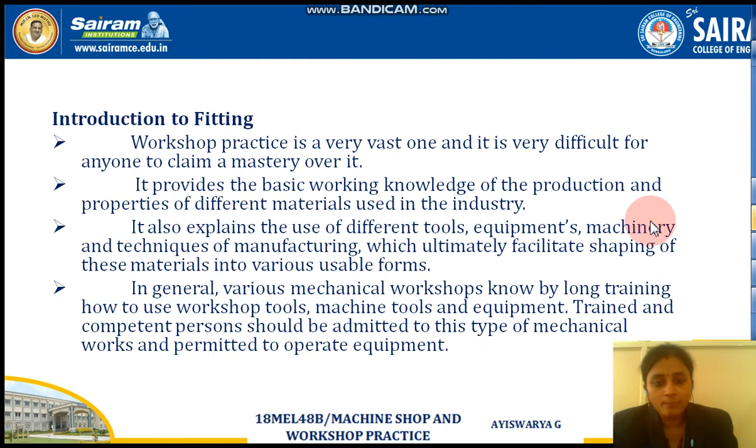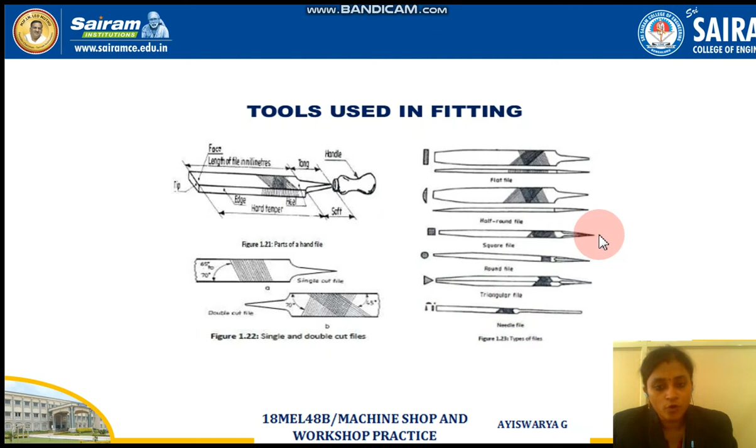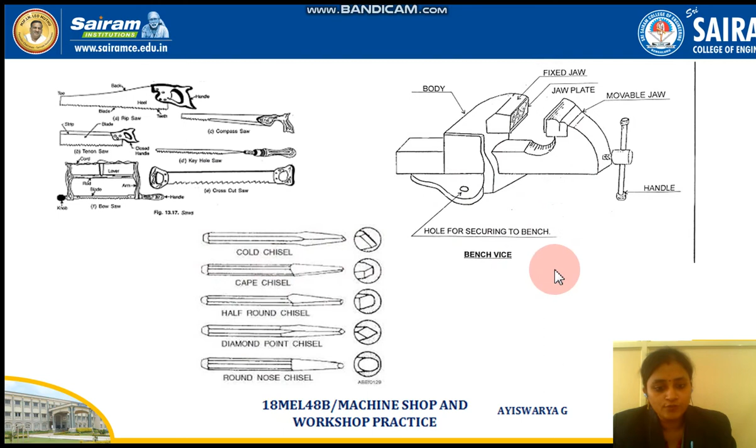Next one is different types of chisel. These are also classified with respect to the tip shape: round nose chisel, diamond point chisel, half round chisel, cape chisel, cold chisel. These are the different types of chisels. So we shall see it further.

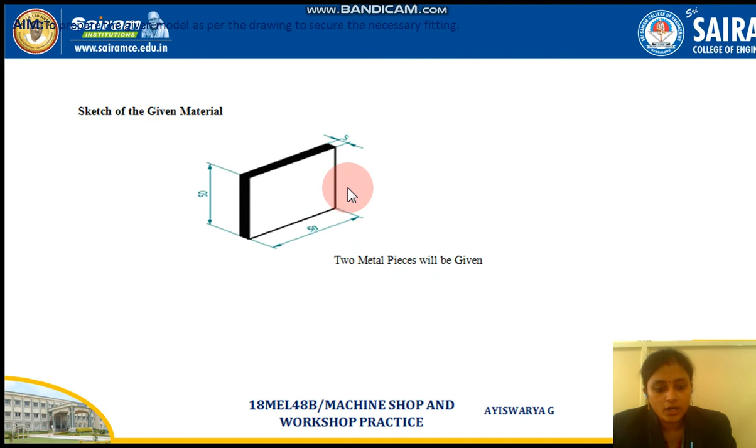So the adjacent sides of the workpiece should be filed using a flat file. First, what you have to do is mark the portion which you want to cut, or the unwanted portions, and then using a punch and a hammer, just punch the portion which is to be cut.

Next, you have to fix the pieces in the bench vise, and using the hacksaw we need to cut the marked portion. Where we cannot remove it using the hacksaw, you can remove it by chipping with the flat chisel and a hammer. Using that we can remove the portions which we cannot do with only the hacksaw. And the part of a piece which is chipped is filed with a hand file.

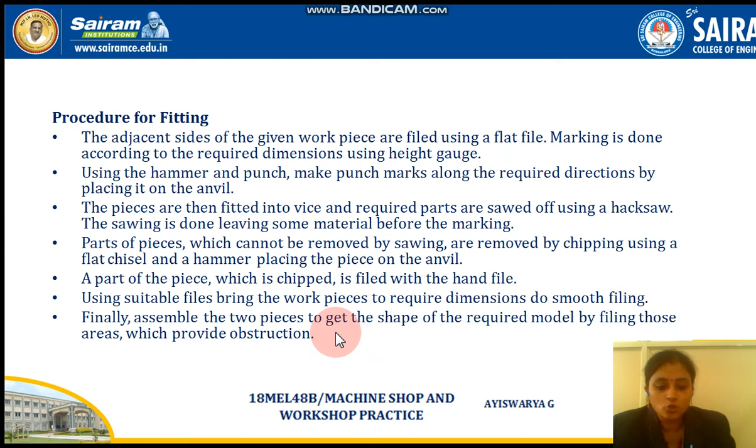So in the upcoming presentation we can see the real procedure, how to make it in the lab. In the upcoming video you will be seeing the exact procedure of making this square fitting.

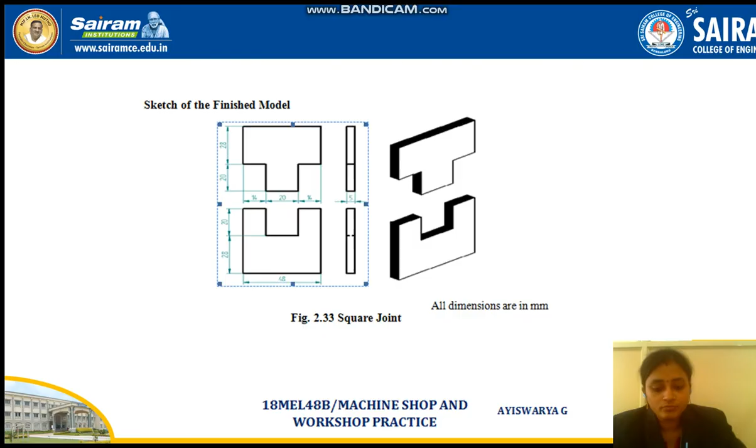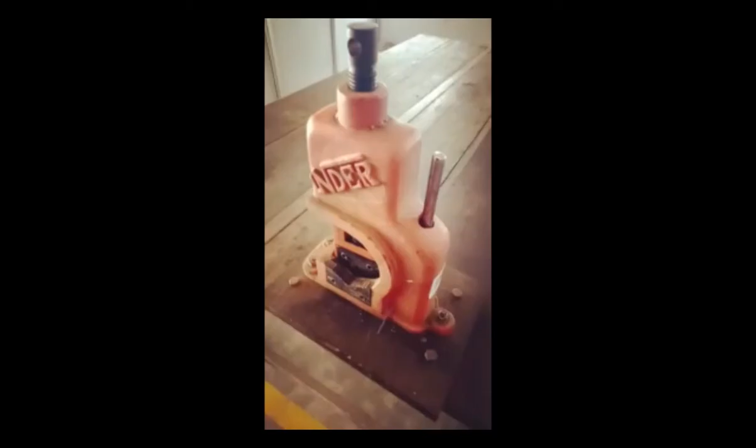You can see a knife edge at the bottom, and half round files or semi round files, and this is a round file, this one is a square file, a triangular file, and finally we have a flat file. This instrument is called a pipe vise, used for fitting, and this is a bench vise. For our experiments, that is triangular and square cut, we are going to use only this bench vise.

Hi everyone, we are going to start the square fitting experiment. This is the raw material for square fitting, and using a scriber we should mark, and we also need to use a steel scale for making the measurements. So we shall see the figure and how to mark the square measurements. So this is the figure.

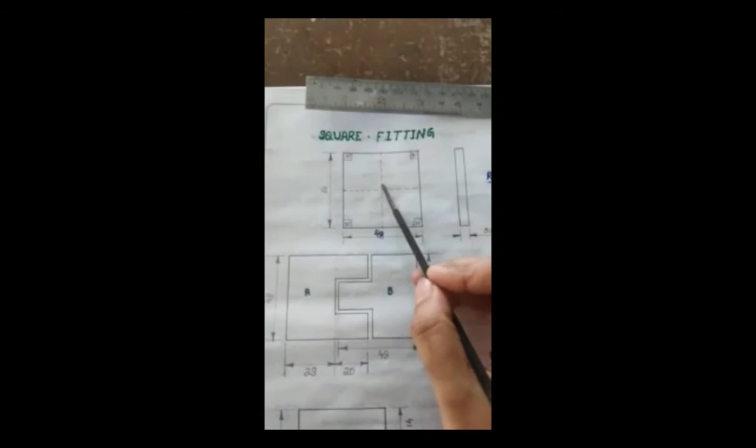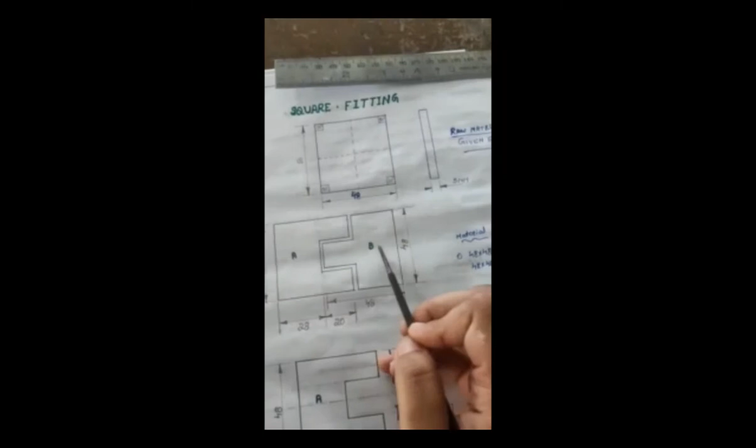We need to take two raw materials in the size of 50 mm by 50 mm. 2 mm is reduced for the sake of insertion and to allow free movement. We need to take two raw materials, material A and material B, like this. In that we need to draw the portion which we are going to cut. You can see in this 48 mm, we need to mark 20 mm in the middle, like this.

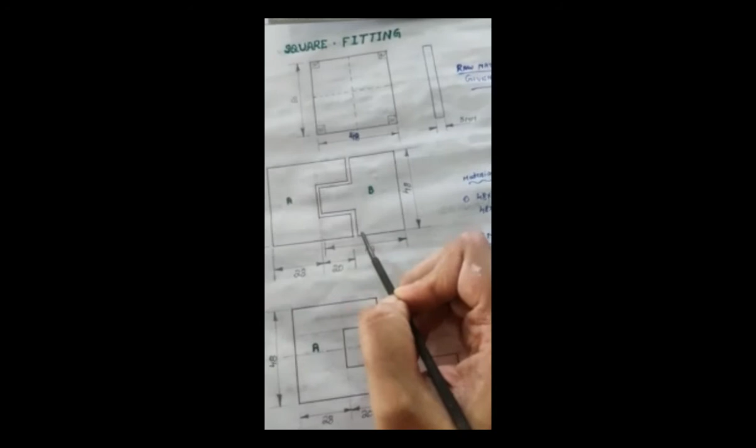And for the B piece we need to cut the center portion as mentioned in the figure. And finally if we cut, we will get A and B in these shapes. It looks like a square; if you join them, you get the square fitting model. So this is what we are going to do today.

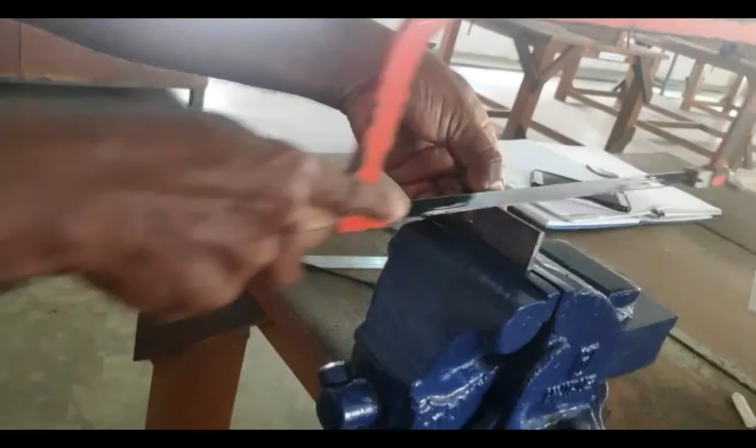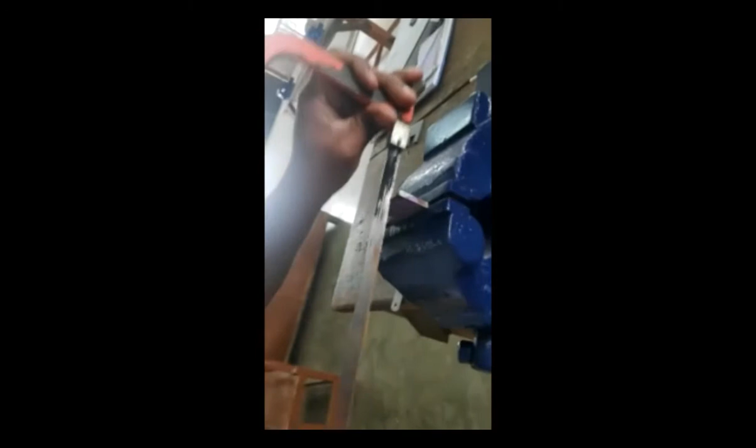So this is how you need to fix it in the bench vise and cut the material. We have already marked the piece, and now we are just cutting the extra portions. You can see the extra portions in the A piece being removed here using this hacksaw. Now the other half is being removed over here. The same procedure is carried out for both sides.

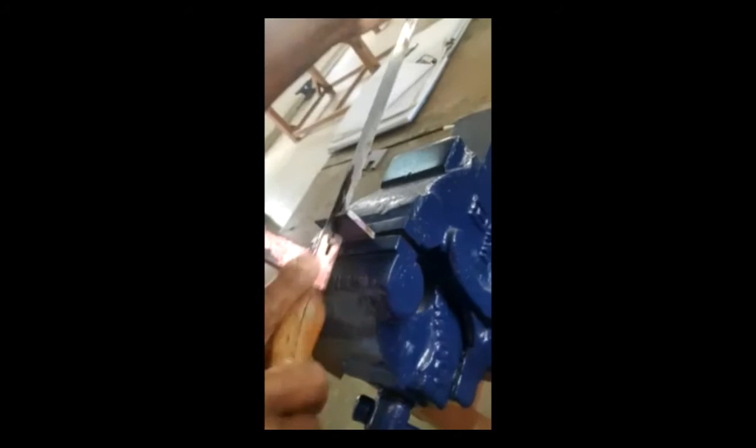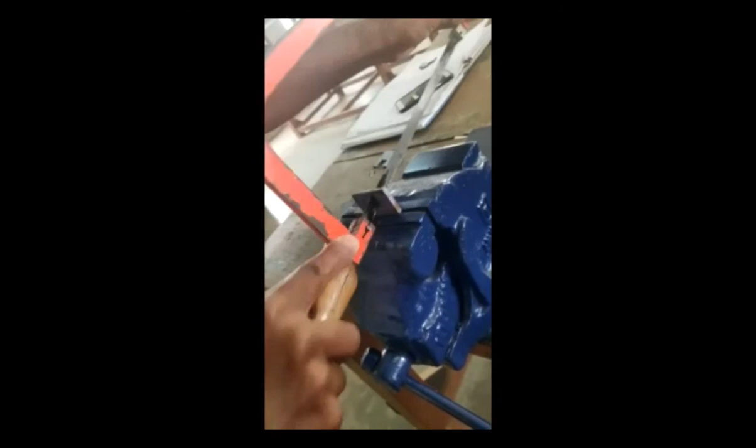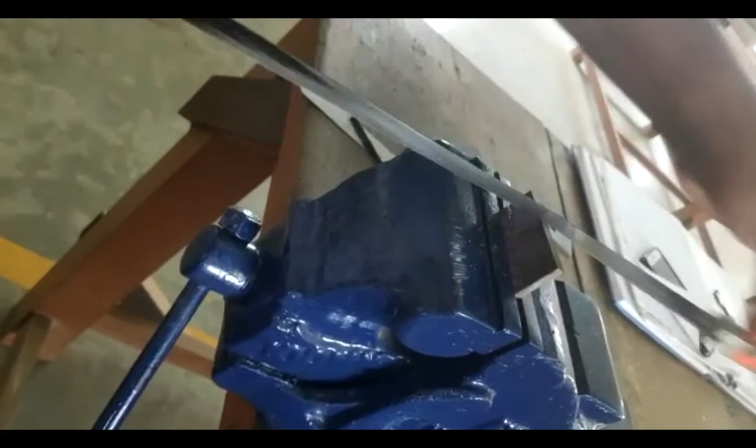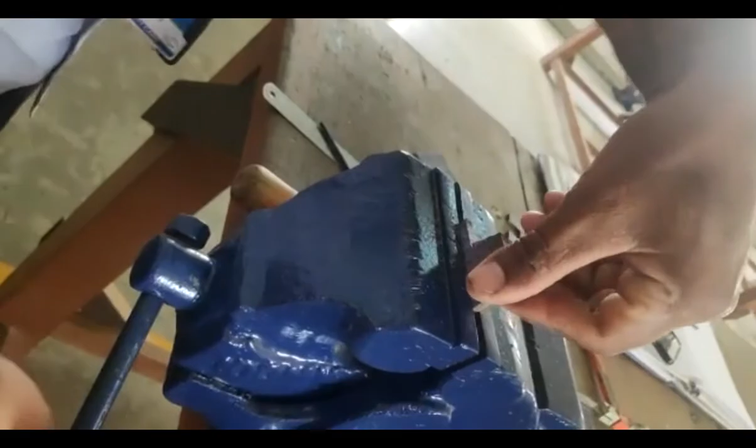Once you have marked the proper scaling, we need to remove the unwanted portions. To remove the unwanted portions, the position of the piece is changed and it is cut on the other side. So the extra piece is being cut. This is how the completed workpiece looks after removing the portions which we don't want.